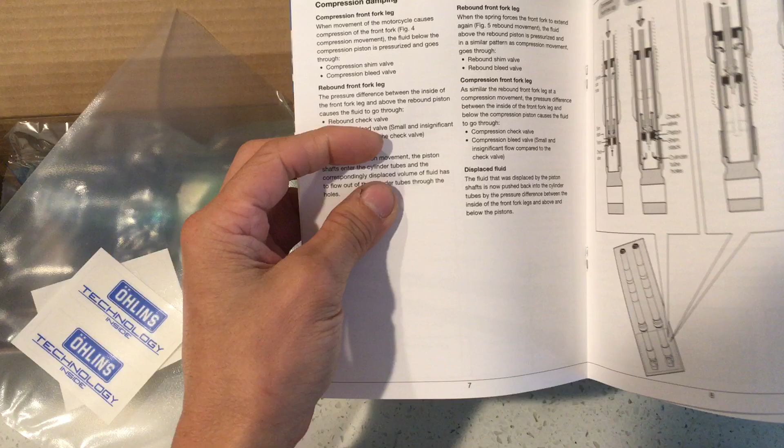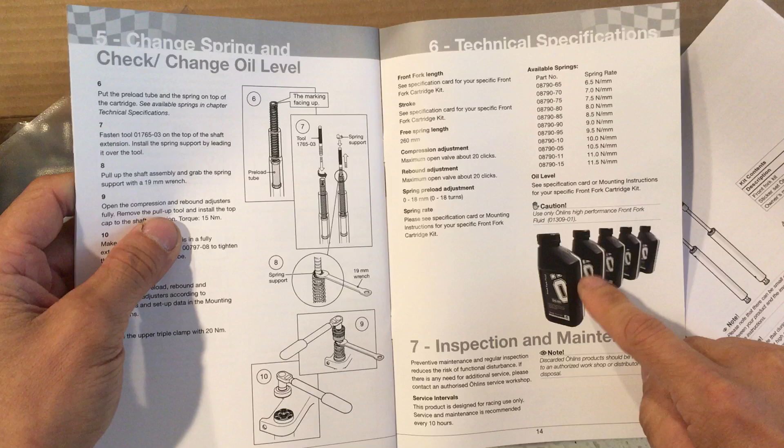All right, so let's look at this. It's the cartridge. So here's the manual. Comes with some stickers. Comes with 2 different manuals. I think this one is just sort of a general manual for their cartridge. And one of the important things about Ohlins is that they recommend you using their fork oil. They call it the fork fluid, 01309-01. So that's the one for the fork oil.

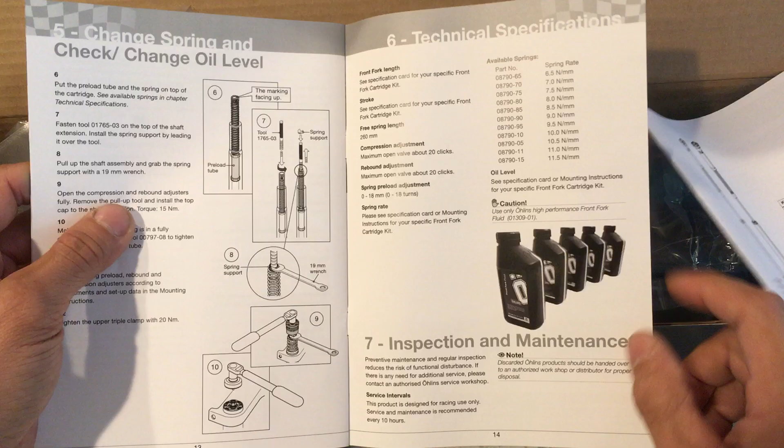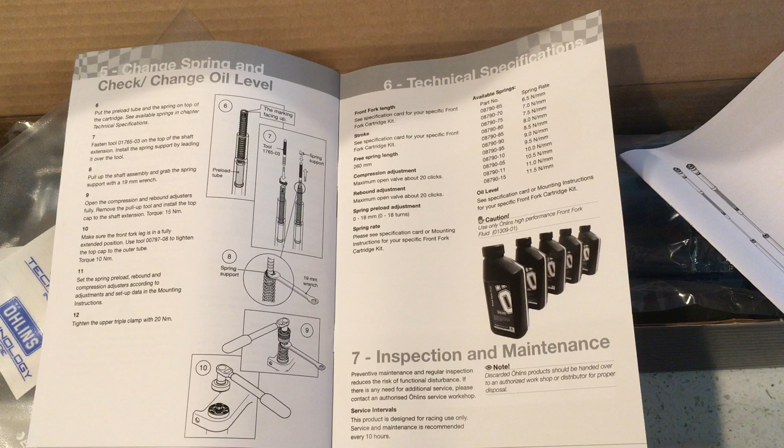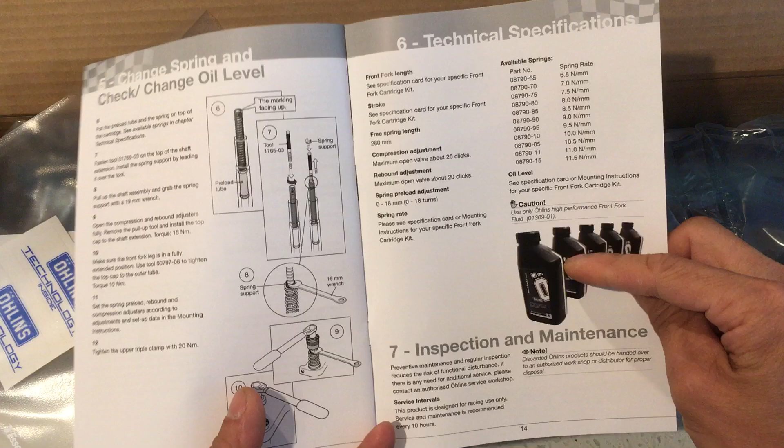Their fork oil is a little bit different from other types of suspension fork oil. When you look at suspension fork oil, let's say you look at a 10 weight oil from 5 different brands, they all say 10 weight, but their actual viscosity is slightly different. You have to actually look at the actual specifications. So Ohlins has their specifications a little bit different from everyone else.

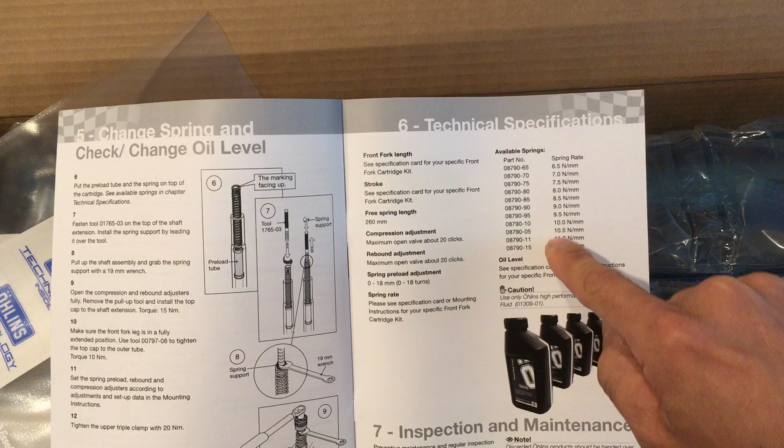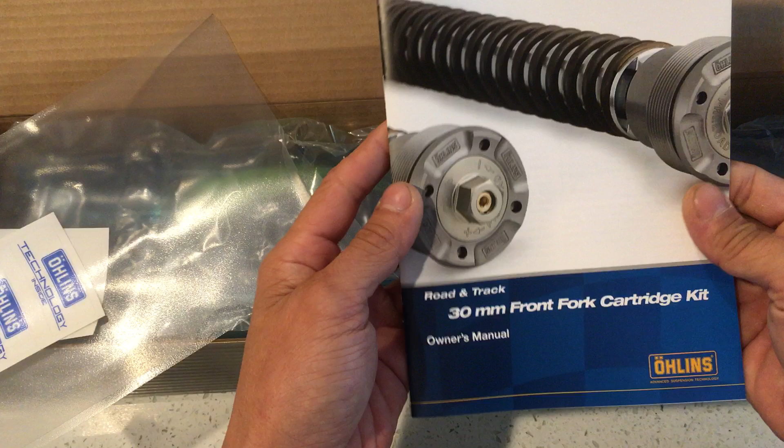So anyways, on here they actually tell you all the various spring rates as well, what's available within the weight range. All these different things, how to put it together, check the oil and all that stuff. So that's the general fork manual, and this one right here is a specific manual for this particular model number. Is that right? Let's see. Yeah, I think so. So this is the general one, and this one is the specific one for the particular model number.

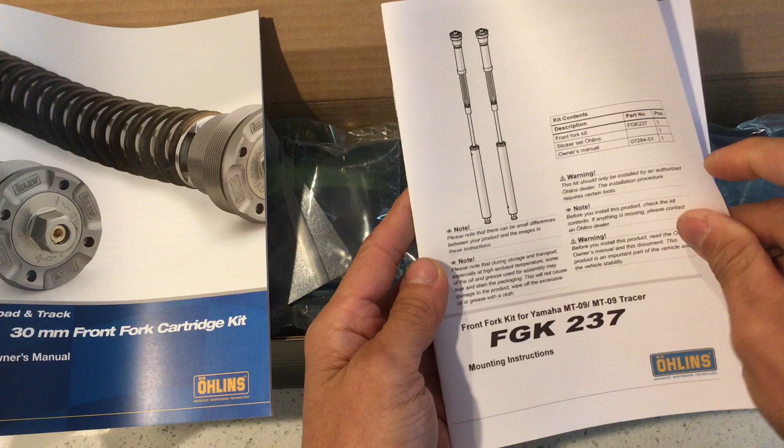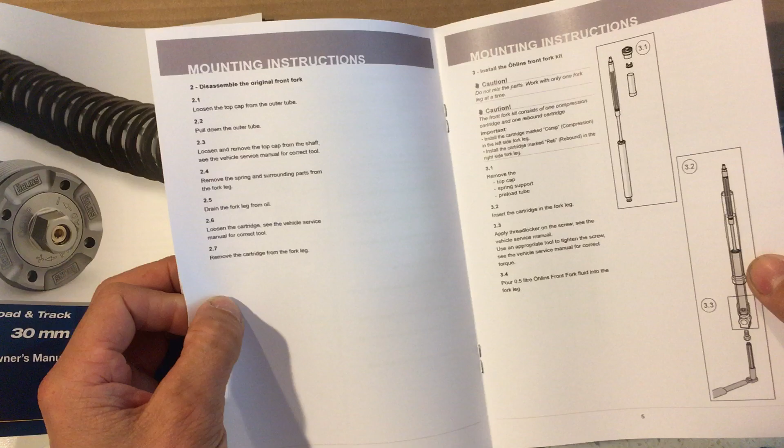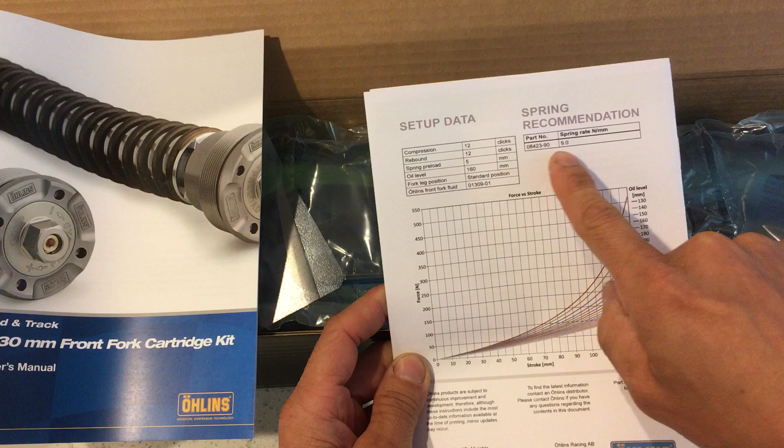And it tells you more or less the same thing too, but again, it's specific for that cartridge. And the cool thing is in the back here, they actually have a thing that tells you how to set up your fork. It actually shows the spring rate that I have, and it tells you about where to set it up at: the oil level, how many clicks for the rebound and compression and preload and everything.

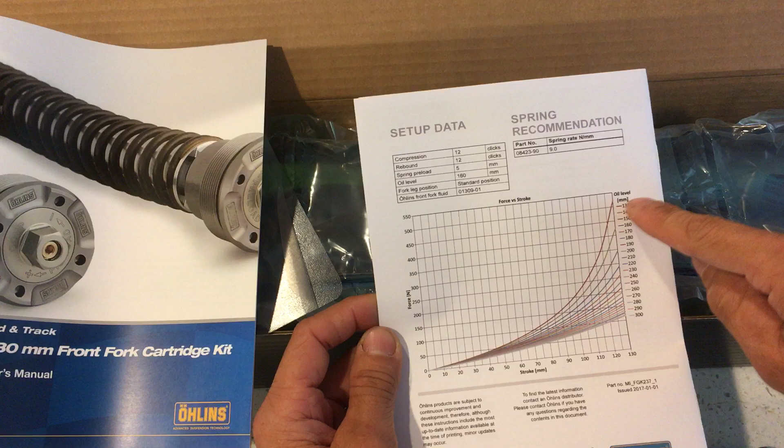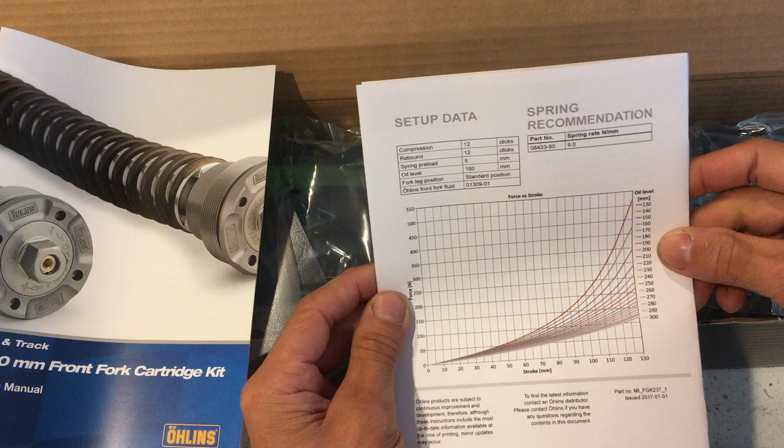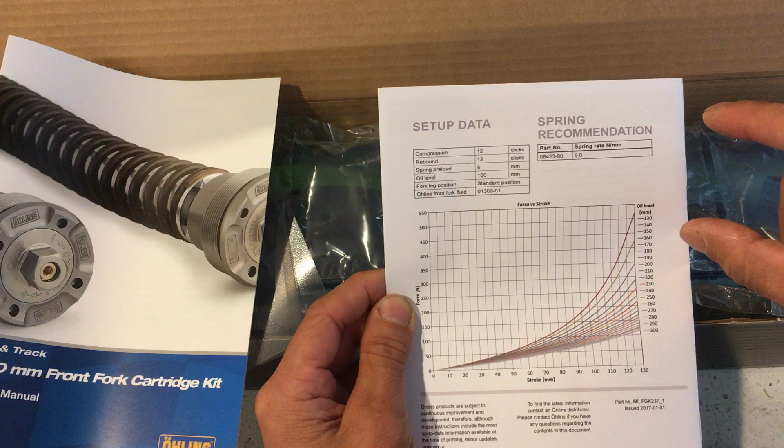And this graph right here tells you the oil level, how it feels at the given stroke. This is the stroke length, and this is how much force there is at the given fork oil level. So the higher up the oil level is, or the shorter the oil level measurement is, it's basically going to be firmer, versus when the oil is lower down, a higher measured amount from the top to the oil level, it's going to be softer.

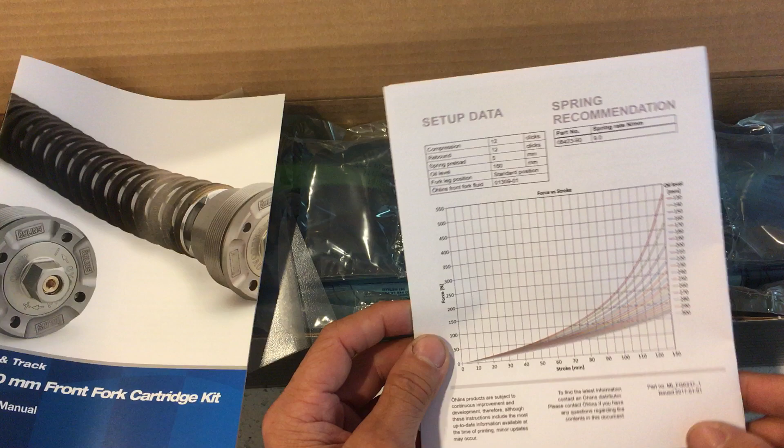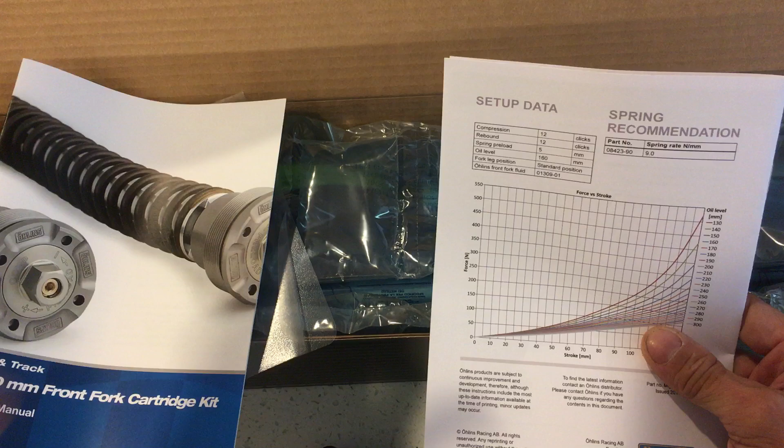So that's cool right there. I like that they did this. A lot of companies don't do this, and you kind of have to guess quite a bit. This one at least gives you a starting point, and from there you tweak it, give a little bit more or less, and for the most part, it's pretty good. From my experience with using Ohlins in the past, I find their numbers are pretty good. I only had to click 1 or 2 clicks away from what they recommend, and it was pretty much perfect. So yeah, let's look at the cartridge itself.

So I think one cartridge is the rebound side, and the other side is the compression side. So here's the bottom of the fork. Right, all the damping rod, all the parts, and blah blah blah.

This is only installed by authorized service center. Basically, that's sort of the lawyer tag right there, to keep them from liability if you screw up. And yeah, so that's basically their cartridge right here. Let's see.

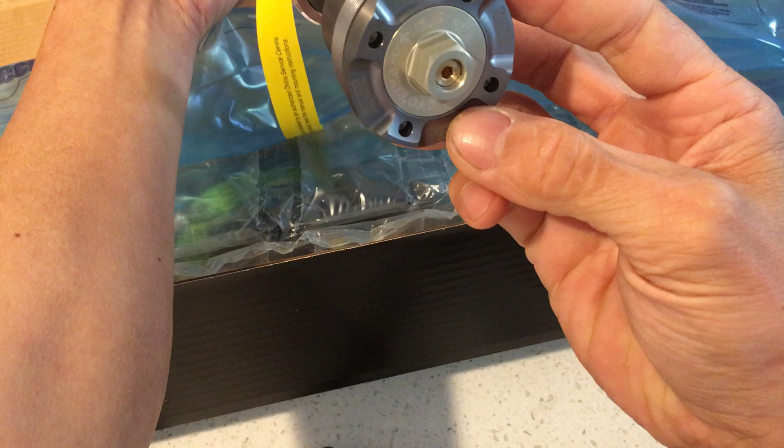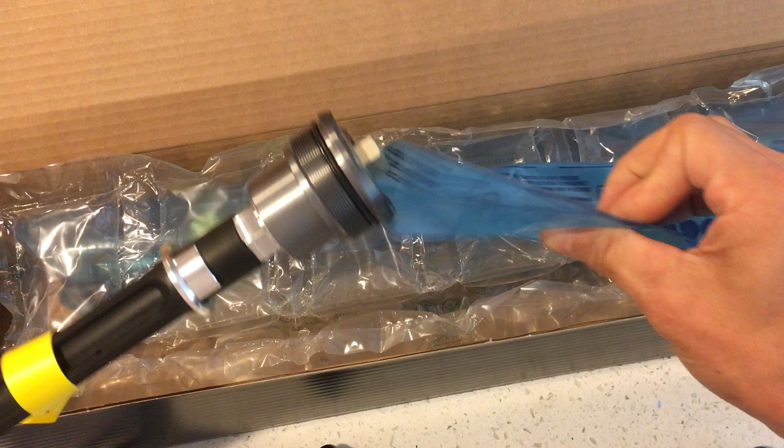So look at this in here. This big nut out here is the preload, and the little one in there is either the rebound or the compression. So I'm not sure this one is rebound or compression. Oh, it's rebound, REB, rebound. So rebound is going to be on the right hand side, the throttle side, and the other side is going to be the compression adjustment.

It's good that they did that. Better forks will have rebound on one side and compression on the other. Usually, I've seen fork cartridges where they put a rebound and compression adjustment on one side, and the other side doesn't actually do anything, and that's kind of goofy. That's just too much work for one cartridge to do. Performance-wise, it doesn't work as well.

So this side is actually just the same thing. And on here it says the outside nut is preload. Then the inside it says comp, meaning compression. And really, the only difference between these two is how the oil flows, the oil circuit. Otherwise, outside of that, they're actually identical.

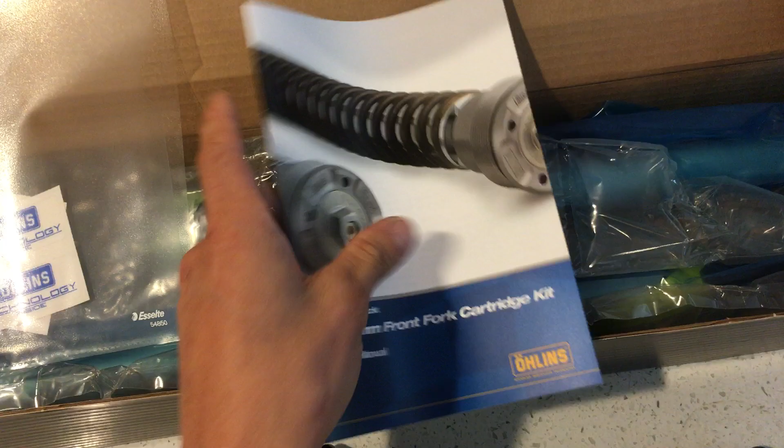So actually, I ordered some of that cartridge fork oil, so that's not going to be here for like another week or so, so I can't install this until then. This one actually shows right here how the circuit flows. So this is the circuit, how it flows right here.

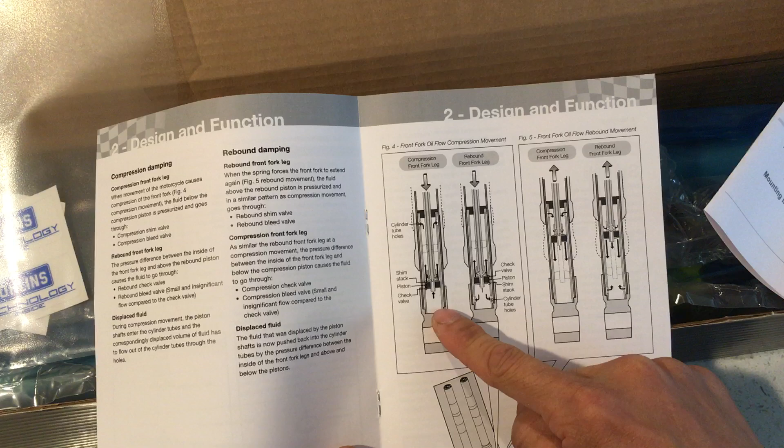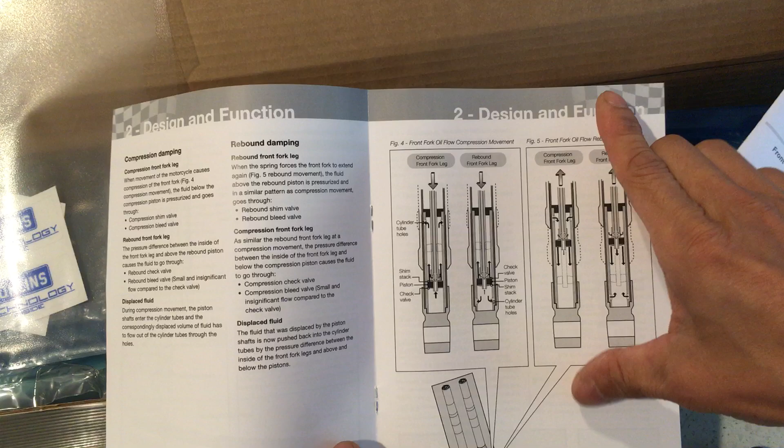This side, the left side, is compression. This left here is the fork compressing. This right side is the fork expanding. So this one here is compression, and this one's the rebound, and basically that shows the oil circuit flow, and basically everything's the same for the most part. It's just a matter of where it flows, and where the orifices are.

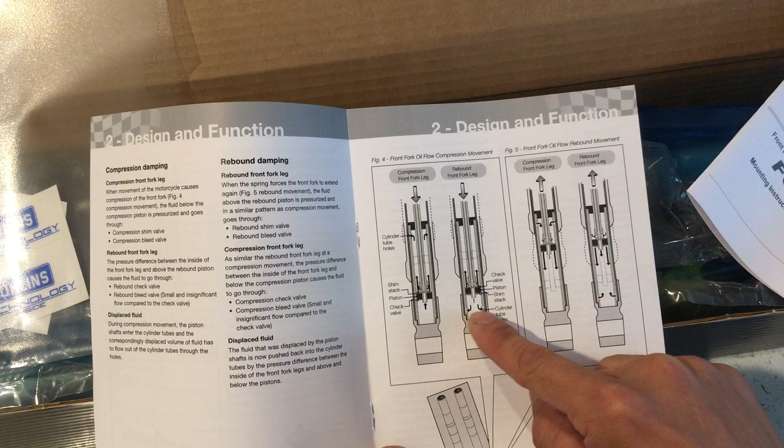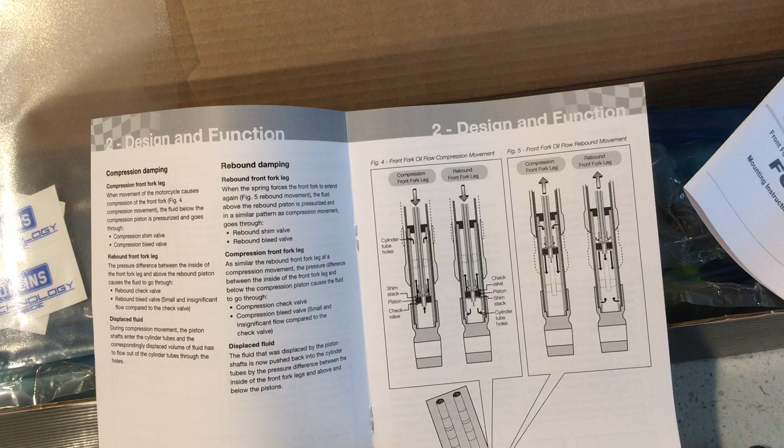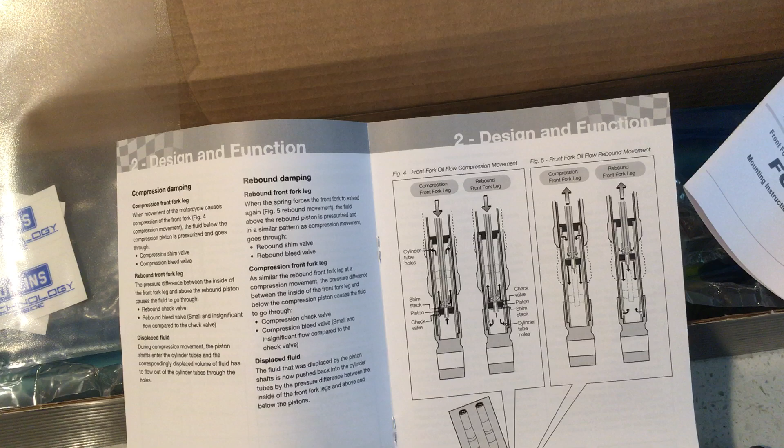The rebound side, there's an orifice down here for when it's compressing, and this side over here, basically which passage the oil flows, the oil circuit, and the actual little damping valve itself, how it works is basically how it's stacked. It's basically just kind of reversed. Think of it as a check valve, that oil only flows one direction: it flows into this direction and out here, versus this one, it's kind of the opposite of that.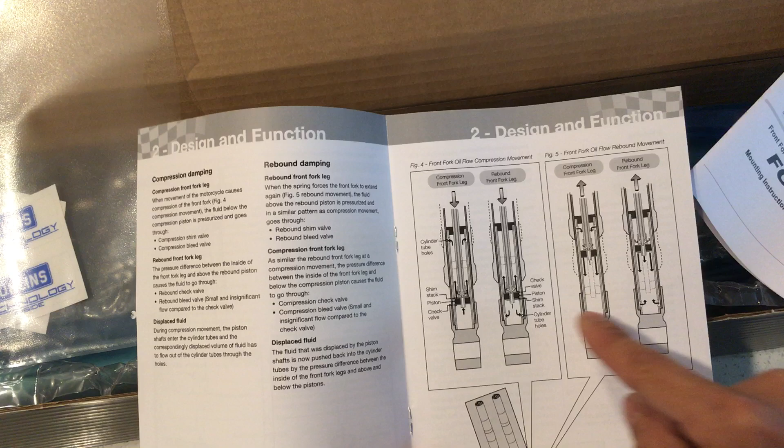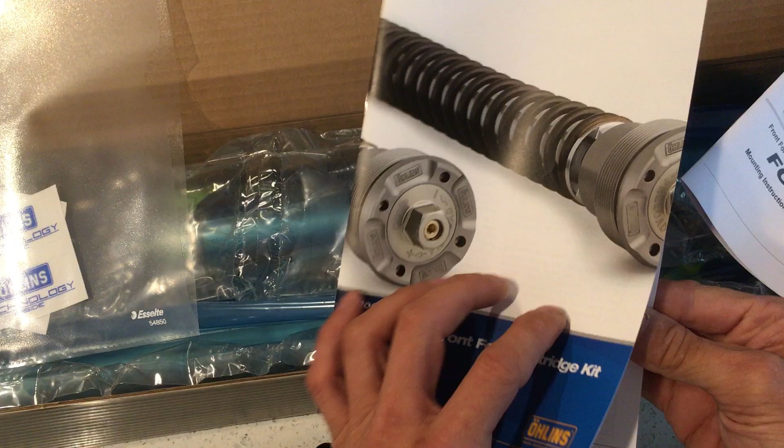When it's compressing, the rebound doesn't work, right? So basically it just bypasses, so it doesn't actually go through the valving. But when it rebounds on this side, it actually goes through the valving, and this side doesn't, and it bypasses. So that's all that is. So anyways, just a little video of what I got.

So I don't have the rear shock yet. I actually ordered the rear shock at the same time, but they were out of stock. Ohlins USA is out of stock, so they won't have any in stock for at least another couple of weeks, is what I was told.

So when you order this cartridge, the cartridge itself and the springs are separate. They're actually two different items. So usually when you order the cartridge, you pick out what spring for your weight, and the springs are about 150 bucks on top of the cartridge. The cartridge I think cost me $1,150, and the springs were $150. So basically the whole thing is $1,300. So there you go.

In another week or so, when I get the fork oil, I'll put this together, and I'll do a video on installing it. I might not video every single minute of the installation because it's gonna take a while, but I'm gonna just go over briefly what needs to be done.